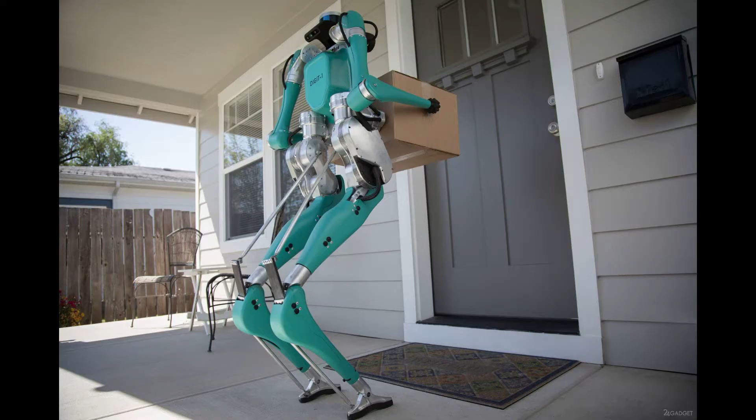Their carrying capacity is too small, distance and speed are limited. They are dependent on weather conditions and cannot ensure the transportation of goods from the manufacturer to the consumers in full. Delivery by robots is also limited, not suitable for serious logistic flows. The delivery robot can get out of control and become dangerous for humans. Snow is an obstacle for the robot, and there is no way to deliver the order to the door of the final buyer in an apartment building.

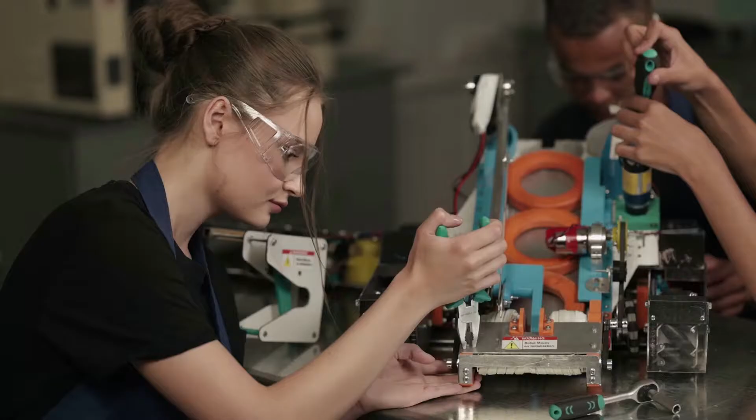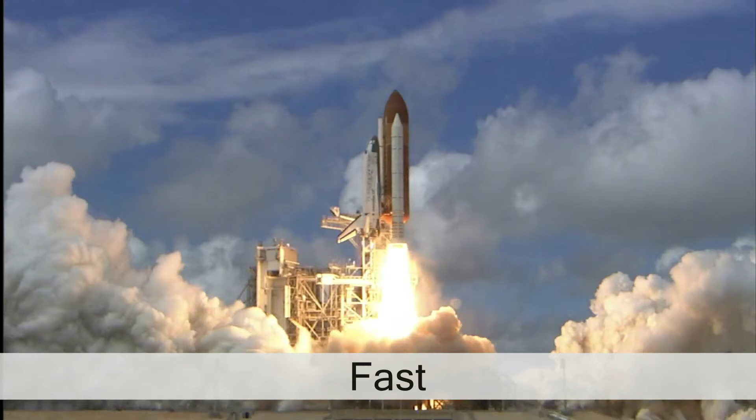Engineers around the world are working on the creation of new transport systems. We need transport that works regardless of weather conditions and traffic jams, has high speed and carrying capacity, doesn't wear out roads and sidewalks or doesn't use them at all. We need a reliable, affordable and environmentally friendly way of cargo transportation that is safe for humans.

There is a solution: small pipeline transport. That's right, transportation through pipelines. This is how oil and gas are delivered, and how it can be true for other goods. Do you think it's impossible? Pipeline transport is already being developed and implemented in the UK, Switzerland, Germany, China and other countries.

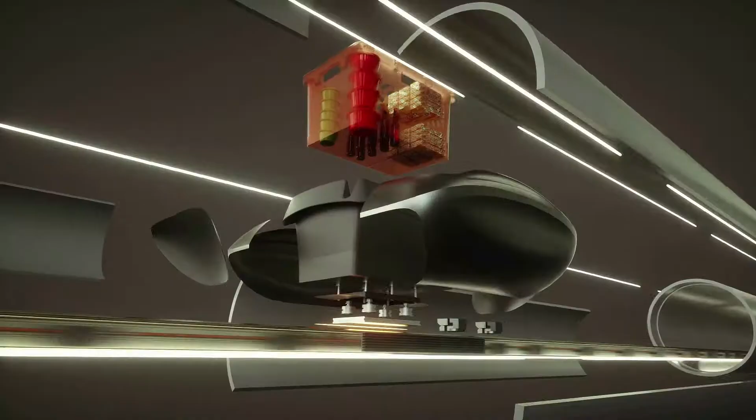One of these is Magway. It can speed up to 60 km per hour. At the moment, it is undergoing sea trials and lines are being built between Ocado warehouses and suppliers. Magway is planning to create a network in the UK and throughout Europe, with the prospect of expanding to all continents.

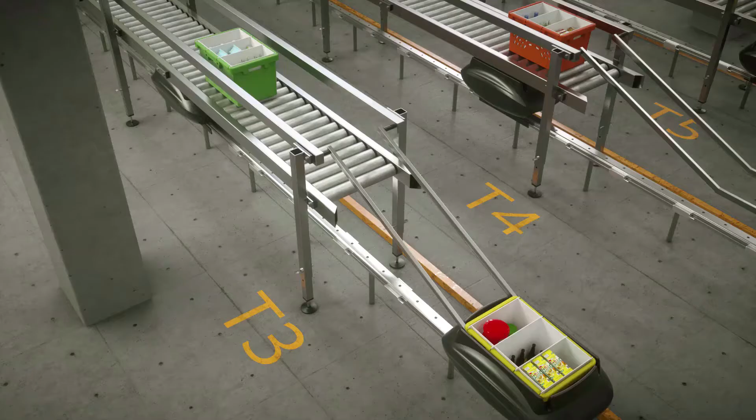Magway technology is like other pipeline technologies, but there is a significant disadvantage. They all contain rollers in their design, therefore the speed doesn't exceed 60 km per hour. The presence of rollers reduces the durability of the transport, and also friction and abrasive dust that is harmful for health is formed in the pipeline.

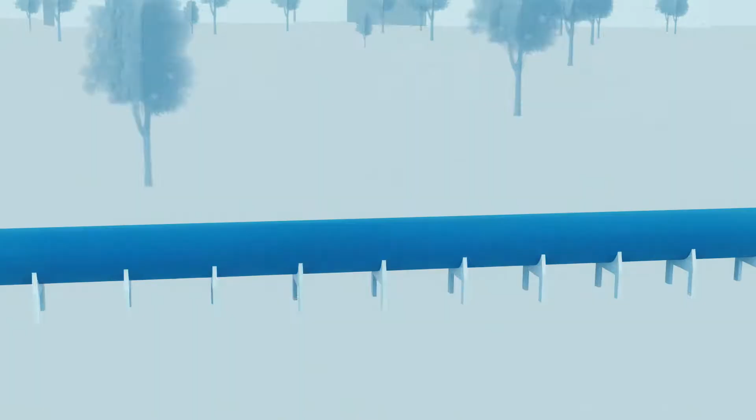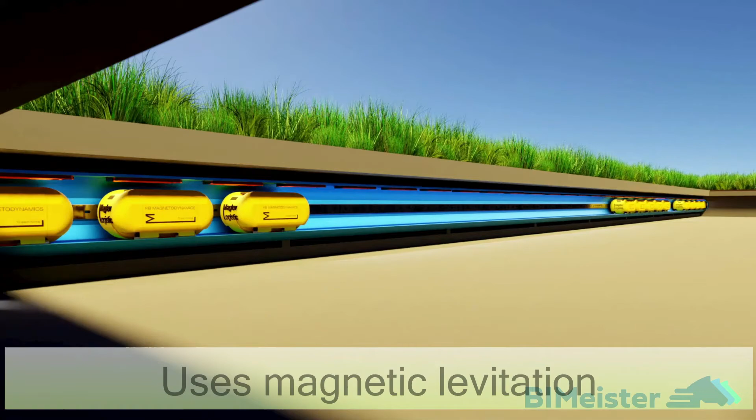Maglev Logistic is a Russian delivery technology with robotic cargo handling at all stages. This technology surpasses all existing projects. No rollers - Maglev Logistic cargo capsules float through the pipeline using magnetic levitation. The speed of Maglev Logistic is impressive: 500 km per hour on the highway and 150 in the city.

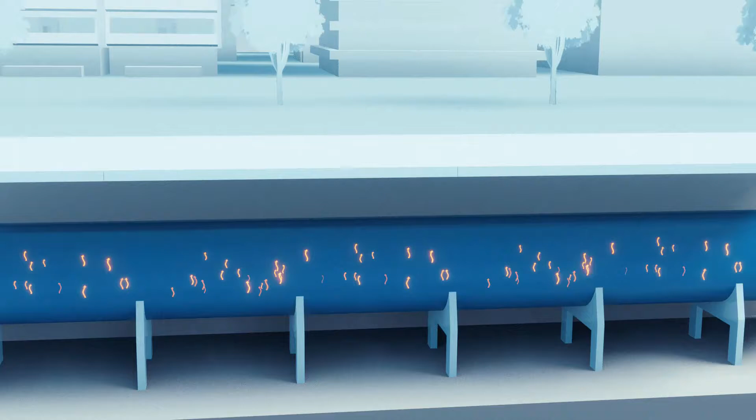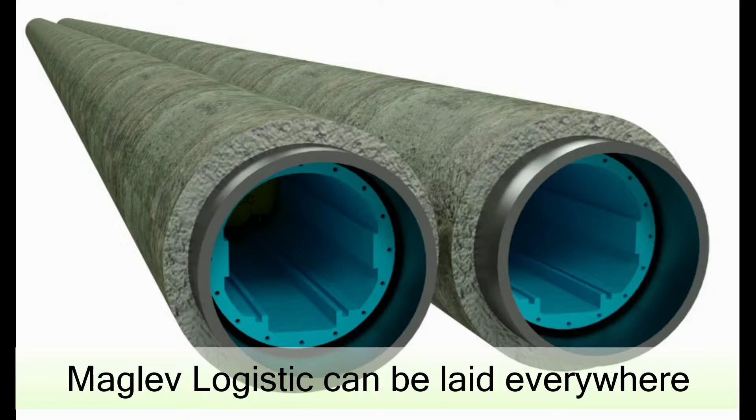The pipeline route can be laid both underground and above it. When laying under a pedestrian pavement, the heat generated by the linear motor can be used to heat it, helping to get rid of snow and ice in winter. The laying of Maglev Logistic lines through reservoirs is carried out in high-pressure pipes, as well as gas pipelines. This makes it possible to connect all the continents with each other into a single transport network.

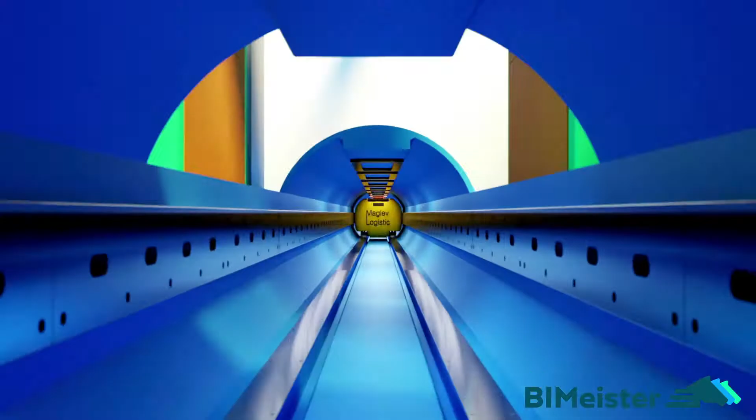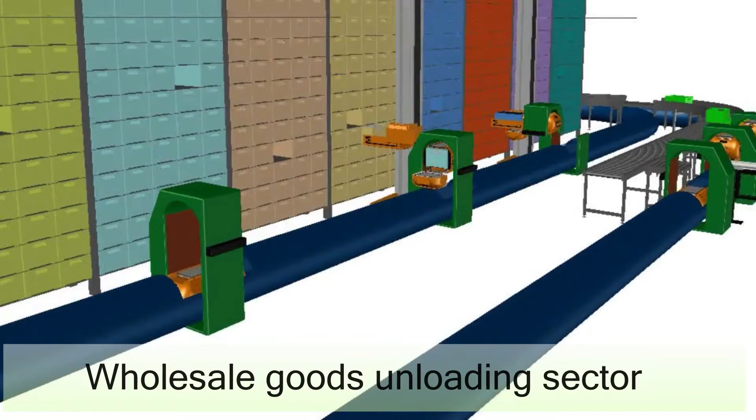Let's consider the work of Maglev Logistic, an automated warehouse store with equipment from Mecalux. Now we can see the wholesale goods unloading sector, which contains racks, a pipeline transport route, single axle manipulators and stacker cranes. And this is a sector for unloading empty boxes from capsules onto the conveyor.

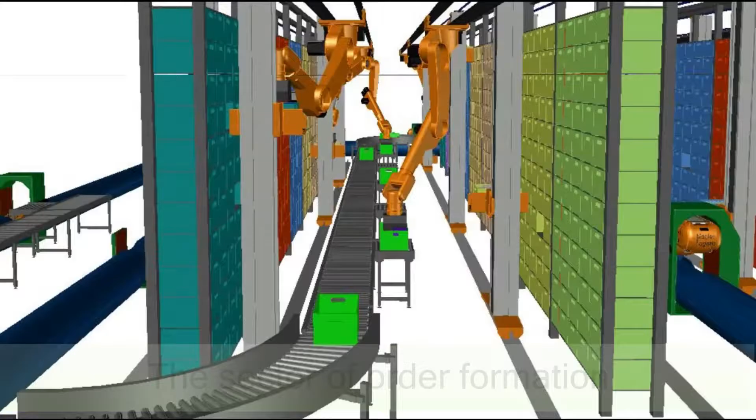It contains a pipeline transport route, one axis manipulators, a conveyor, and tables for receiving boxes with a pusher. On the other side of the rack, there is an ordering section which contains a conveyor with loading tables, six axis manipulators and stacker cranes.

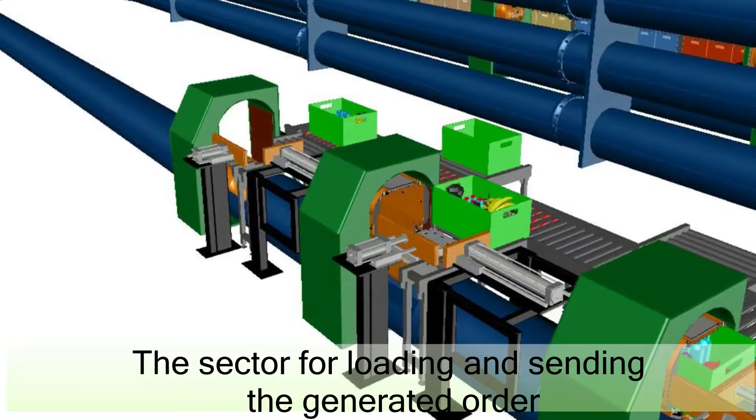Racks separate the wholesale goods unloading sector from the order formation sector. These sectors alternate, creating departments of goods in a store. Each section has a different color. The automated warehouse shop ends with a sector for loading and sending the generated order.

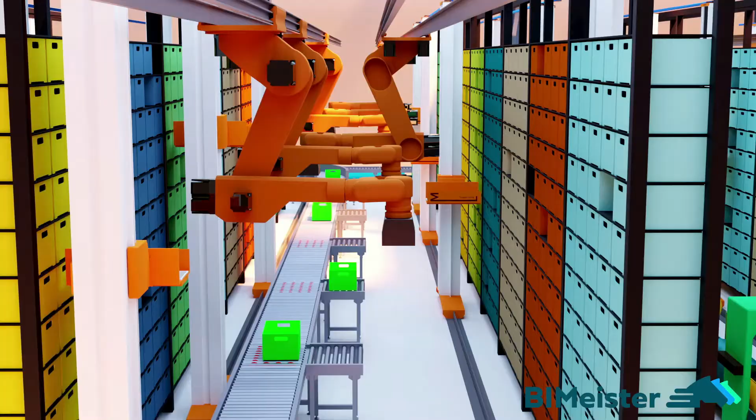A depot was built for storing capsules. The lower pipe is a sink for capsules in boxes. In the unloading sector, a box with bulk goods from a capsule is unloaded by a manipulator under a platform of the stacker crane, which puts a box with the bulk goods on a rack.

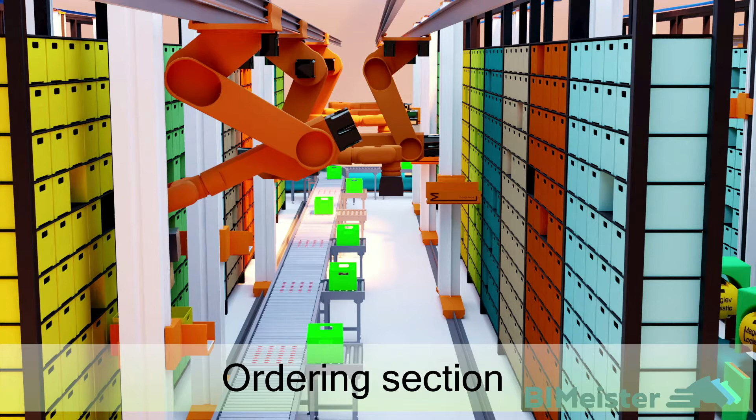On the other side of the rack, there is an ordering section, which contains a conveyor with loading tables, six axis manipulators and stacker cranes. The stacker crane moves the box to its platform.

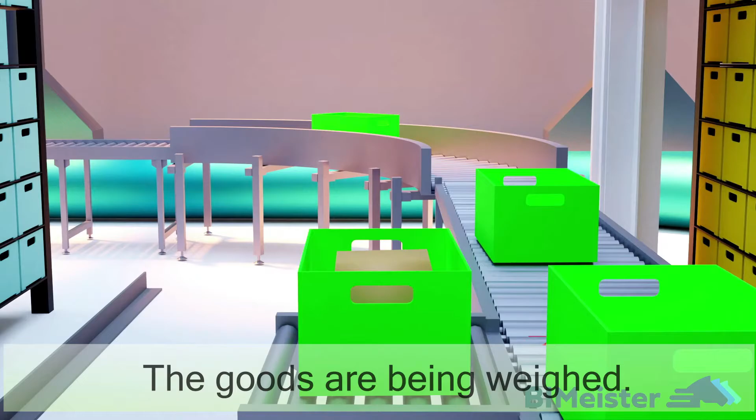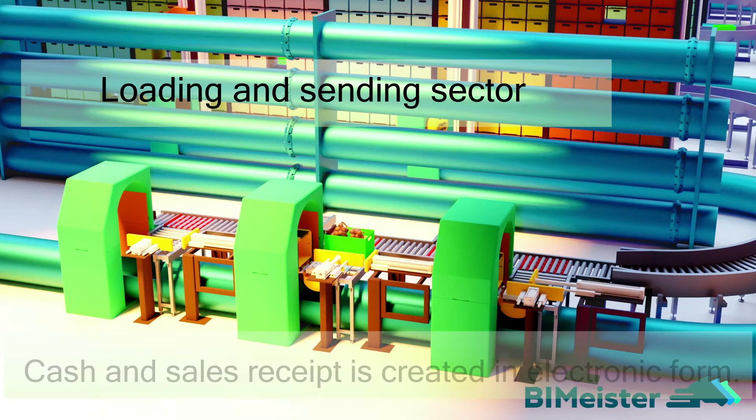The manipulator picks up the goods one by one and transfers them to an empty box located on the conveyor table. While the process of movement by the manipulator takes place, the goods are being weighed. Then the box is moved along the conveyor to another loading table, and the next filling with goods is carried out.

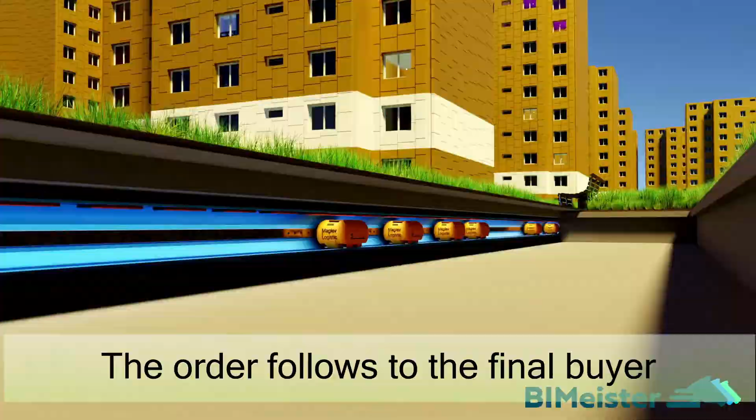In this sector, a cash and sales receipt is created in electronic form. The capsule is loaded with a box with an order, put on a transport route, and follows to the final buyer. The buyer receives an SMS with the exact data on the arrival of the order and a code to access it.

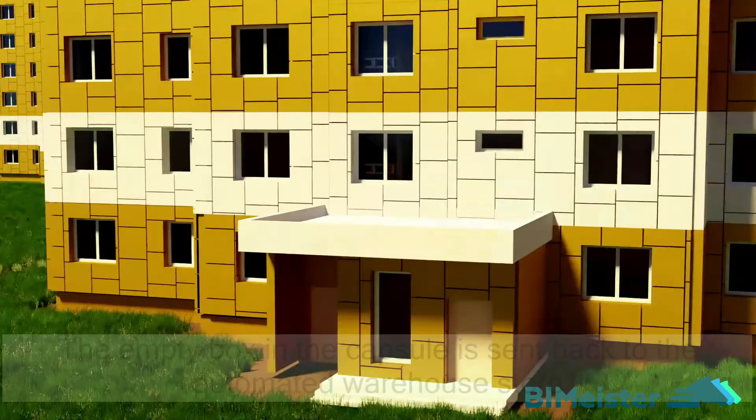The buyer picks up the order, the box is moved into the capsule and follows back to the automated warehouse store to load the next order. The capsule for a new order arrives in the sector for unloading empty boxes onto the conveyor. The box is unloaded and following the conveyor moves to the loading and dispatching sector, being filled with goods.

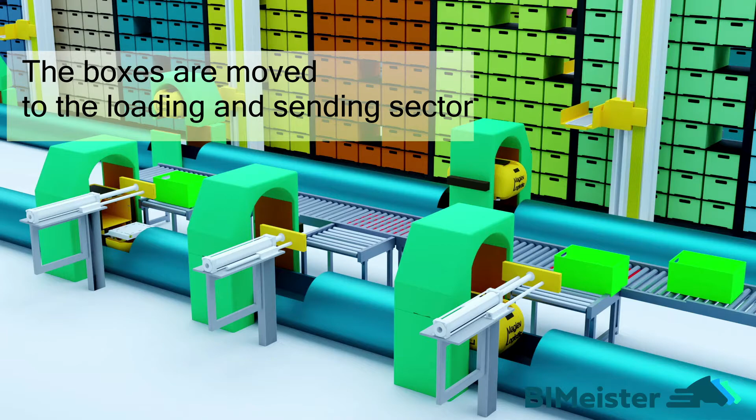Manufacturing plants send wholesale goods to a warehouse store, where the goods are formed into orders and sent to the final buyer. Final buyers can rent capsules from the warehouse store and exchange packages, like photos on social networks.

Maglev Logistic delivery technology is the near future in logistics. It's suitable for use in various fields, for example for sorting non-organic waste, which is immediately sent to waste processing plants. The revolution in logistics has already begun.

The world is moving to new technologies. The Russian project Maglev Logistics surpasses all existing developments, both in terms of technical and economic indicators. There is no doubt that the future of cargo transportation belongs to the Maglev Logistic magnetic levitation pipeline transport system.